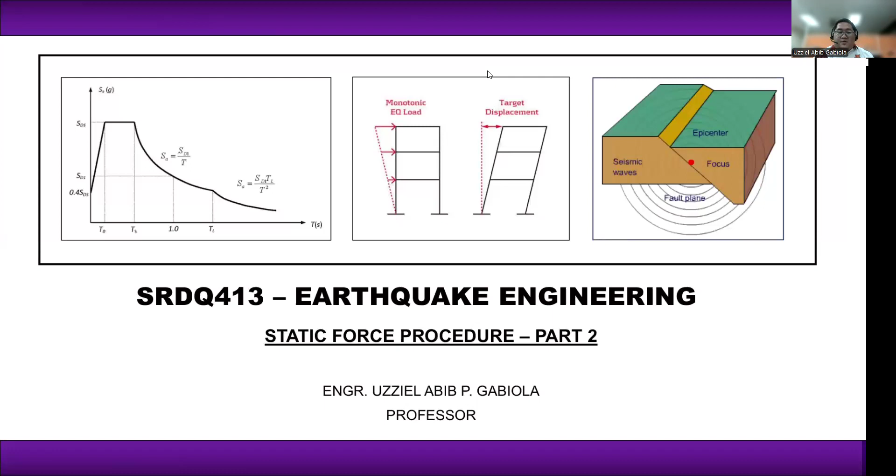Para doon sa ating pag-calculate ng earthquake o yung seismic force natin. So for static force procedure, ito yung kailangan unang ma-identify natin: we need to calculate yung structural period natin. So when we say structural period, we are pertaining dun sa time it takes the structure to oscillate or to go back to its original position in one cycle ng ating oscillation ng ating earthquake.

As mentioned, we have two methods: method A and method B. For method A, we have this equation, T is equal to C sub T times H sub N raised to 3/4, wherein yung C sub T will depend on the type of material used in your structure and kung anong structural system meron tayo. Let's say, for this example, we have a steel moment resisting frame.

So we will be using this value. If we have an RC concrete moment resisting frame, we will be using this value. If the structure that you have doesn't fall under these two categories, we will be utilizing the other value, which is for other structural systems na meron tayo.

And then we have here yung H sub n natin, na ang alam natin, H sub n correspond dun sa height nung pinaka-top ng structure natin in reference with our natural grade line. Okay, so sa NGL natin.

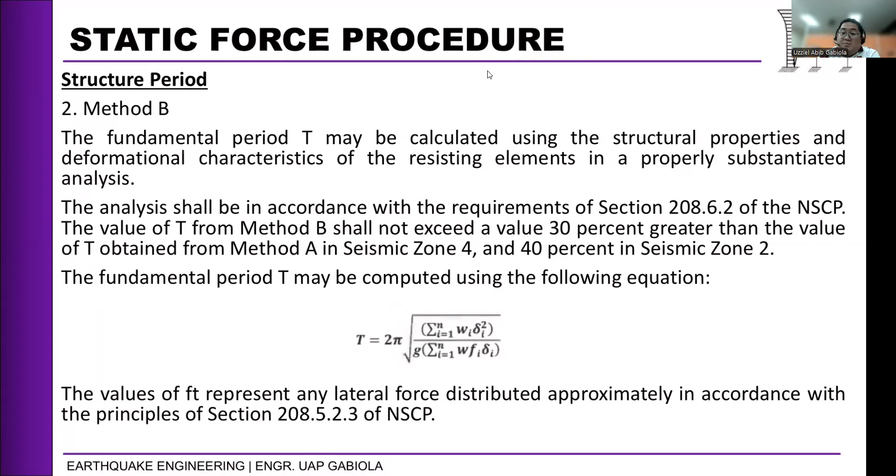We also discussed last time yung method B. Pero for method B, we said na this would take further analysis kasi kailangan natin yung deformation ng structure natin. Para ma-simplify natin yung approach, since we tend to calculate lang naman muna yung possible value, yung conservative value ng earthquake or seismic force, we tend to use method A lang for our discussion. So ang gagamitin lang natin is itong method A, which is itong formula na ito.

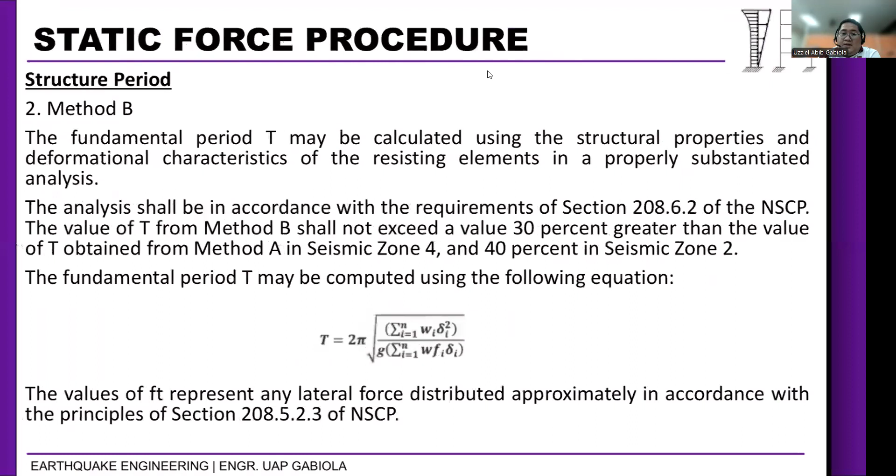After identifying our structural period, we can now calculate yung design base shear natin based from these equations. Sa design base shear, nakadepend siya doon sa mga parameters na diniscuss natin during our preliminary or introduction sa earthquake resistant design. For this case, we have here yung formula for the design base shear, wherein that is equal to C sub V, yung ating seismic coefficient, multiplied by our importance factor based from our occupancy category, divided by our response modification factor in reference to table 208-11 ng NSCP.

Depending on the type of material, may value po yan. And then yung T natin, which is yung period natin. After that, that is being multiplied dun sa weight ng structure natin, o sa total weight ng structure.

So after calculating the design base shear, we need to compare it with three values: 3 kapag zone 4 tayo, pero pag zone 2 tayo, 2 values lang. So we have here yung maximum natin, this can be considered as our Vmax. Okay, Vmax, so that is equal to 2.5 CaI over R times W.

And then we also have these two equations. This will be our V minimum. Let's put a subscript na one kasi that will be used when our structure is located inside seismic zone 4. So dalawang consideration for minimum, whichever is larger yun yung mag-gogovern, at i-compare natin with our design base shear. So this will be our V minimum 2.

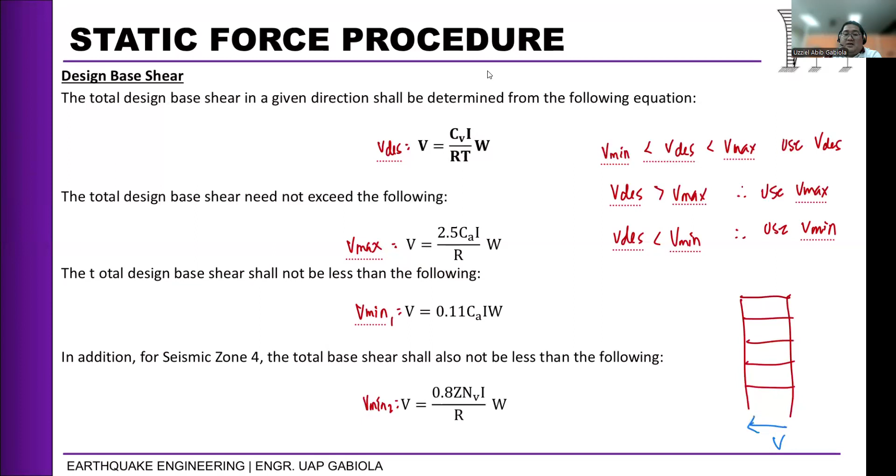And to do that, we need to understand the vertical distribution of our base shear, or the distribution of force. The code specifies a formula for that. The total force, or the base shear, shall be distributed over the height of the structure in conformance to the following equations.

So the first one is this: F sub t plus summation of f sub i is equal to V, from i equals 1 to n. So we have two terms. Actually, we don't need to memorize this at all, because it only means that when we have a structure - let's say we have this frame.

At the top of our frame, there is a force - we'll call it force FT. And then on the succeeding levels, or even on the top, we have Fn. And then we have Fn minus 1, Fn minus 2, Fn minus 3, then Fn minus 4. So we have a diminishing value of forces or lateral forces at each floor level.

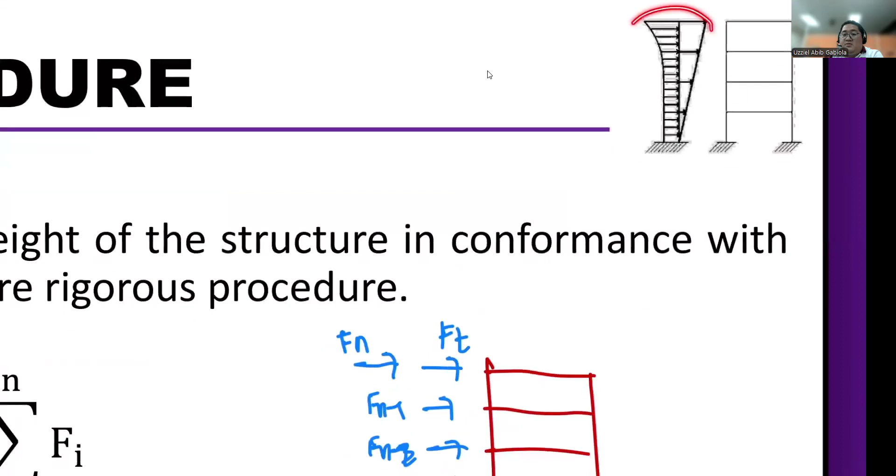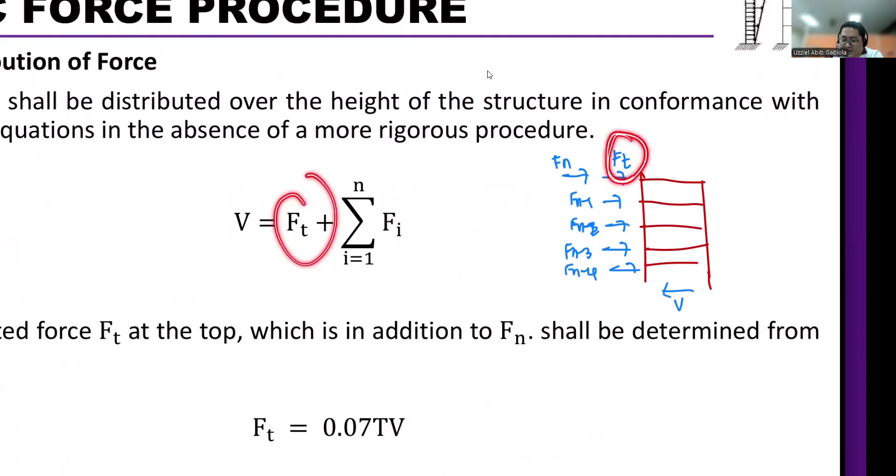Because as our stories become higher, at the higher level, the seismic or lateral forces due to earthquake become stronger. So the value of our forces should look like this at the top - the distribution is larger at the top and decreases as we go down in value. So as you can see, our base shear should be equal to the summation of the force at the top plus the summation of all the rest - they should be equal to each other.

And then in calculating for F sub t, we have this equation: F sub t equals 0.07 times T times V, where T is the period of our structure. So we need to calculate our period, and also multiply it by our base shear.

But there's also a requirement in the code. Once we calculate our F sub t, it should not exceed 1/4 of our base shear. Also, for our period, we need to check that when our period is less than 0.7, we don't need to consider F sub t - we can neglect it. But if, for example, it's more than 0.7, we need to add F sub t to our F sub n, or our topmost level.

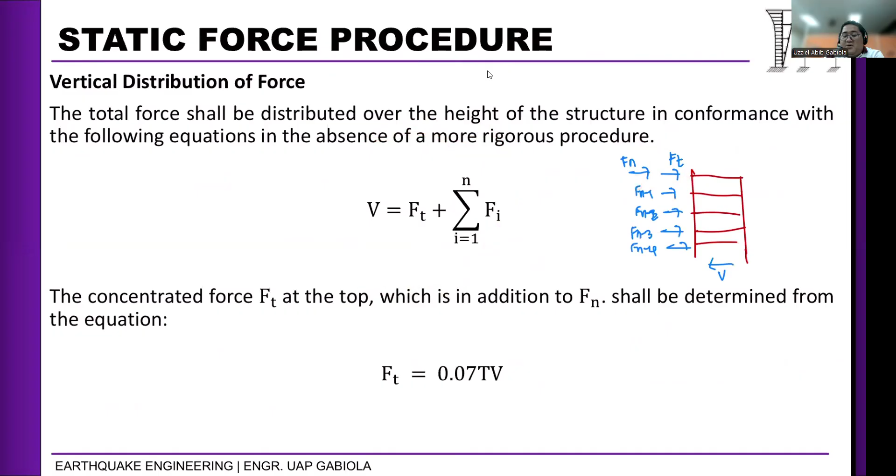So to get the value of forces acting on each floor level, this is the equation we'll use. But we don't need to memorize this one - we just need to understand what this equation represents. As you can see, in the first part, V minus F sub T, this just represents our base shear itself at the bottom.

Binabawasan lang natin yung value ng F sub T, yung capacity ng force at the top. So binabawasan natin, multiplied by a product ng weight at height natin, yung relative height ng floor level na pinakinaan natin, all over yung summation ng mismong product ng weight times height.

So later we will demonstrate how to calculate or distribute yung mga forces natin. But first, we need to answer again this example that we had. Ni-revise ko lang po yung drawing, but the same procedure applies.

Una, determine natin yung design base shear for a five-story concrete SMRF, Special Moment Resisting Frame building. Given: zone 4, Z equals 0.4; seismic source type A; distance of seismic source is 10 kilometers; soil profile type SC; importance factor I; R equals 8.5; and weight equals 7,300 kilonewton. Itong 7,300 kilonewton is taken sa weight ng each floor level natin. When we sum up this floor level, that is equivalent to 7,300 kilonewton.

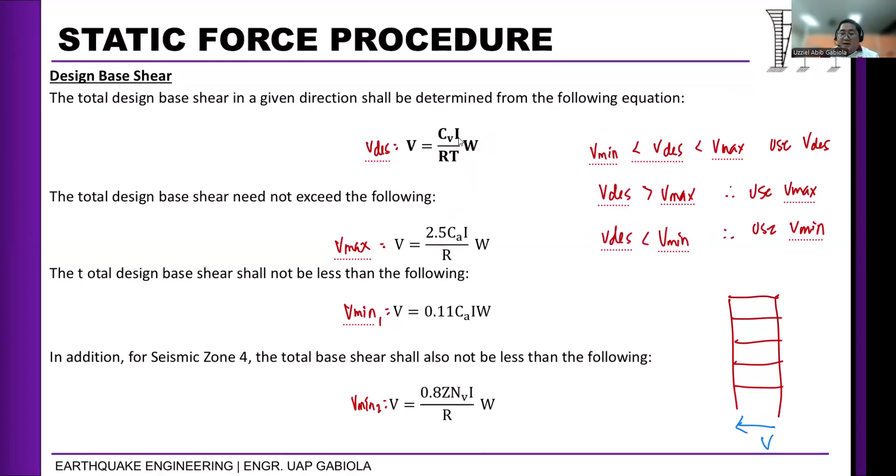Okay, so ito hindi pa to identified. Si I, okay na tayo. Si R is already given, 8.5. If not, dapat titingnan nyo siya sa 208-11 ni NSCP. Si period is not yet calculated. Si W meron na. Si CA, wala pa din. So kailangan muna natin kunin yung parameters natin, yung mga factors natin from the condition ng ating mismong location ng site natin.

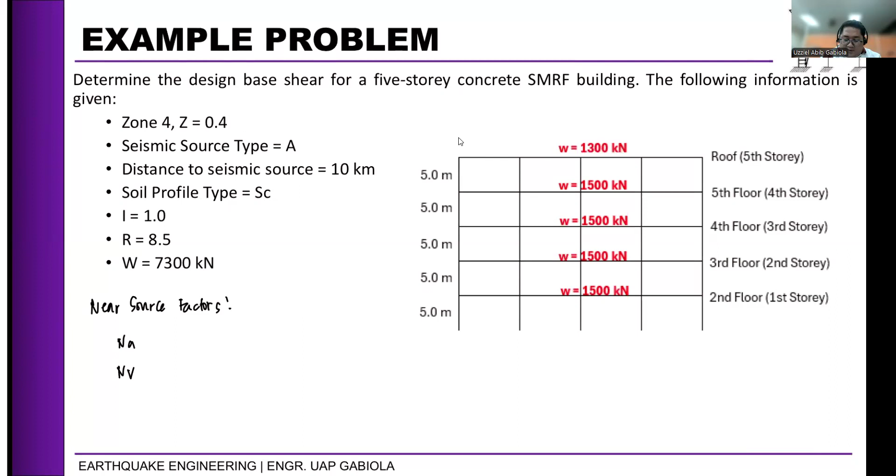Una is to calculate the near source factor, yung NA at NV natin, considering yung ating properties na nandito na. Let's use this table. Our seismic source type according sa given is type A, at ang location natin is 10 kilometers. So gamitin natin yung intersection nila, A at 10 kilometers. Ang intersection nilang dalawa is 1.0 for NA, then 1.2 for NV.

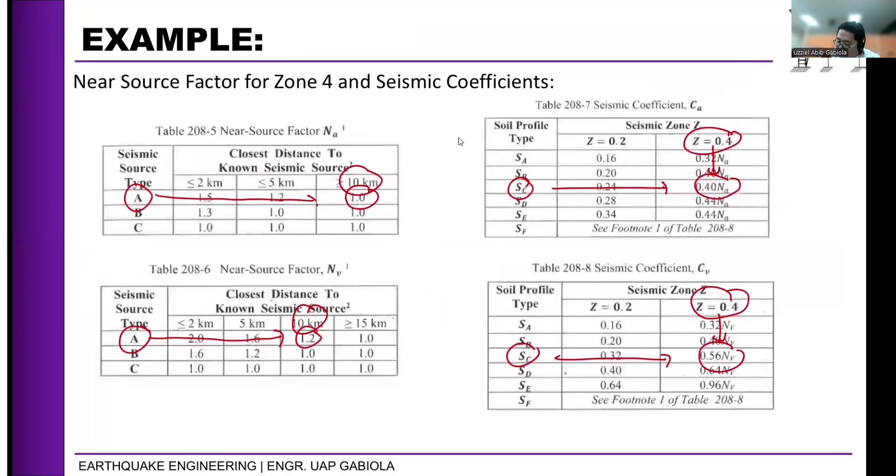At para sa CV, 0.56 ng NV. So CV is equals to 0.56 times 1.2, that is 0.672. Okay, so after calculating yung CA and CV, we can also calculate yung value ng ating period.

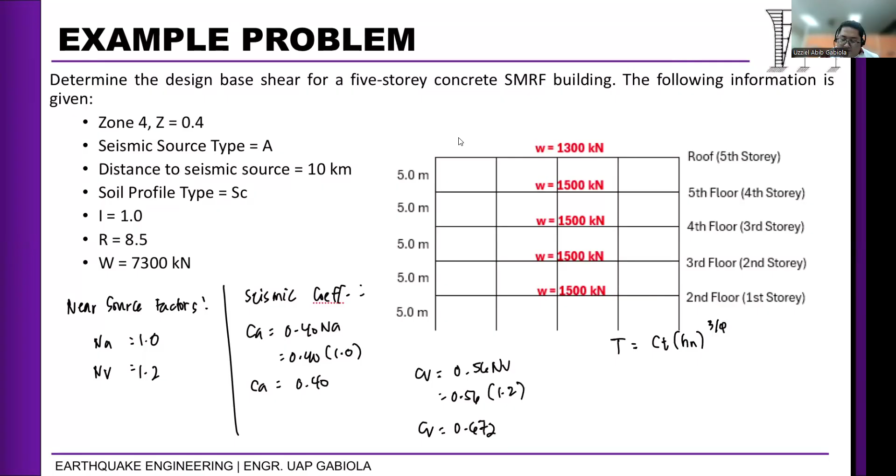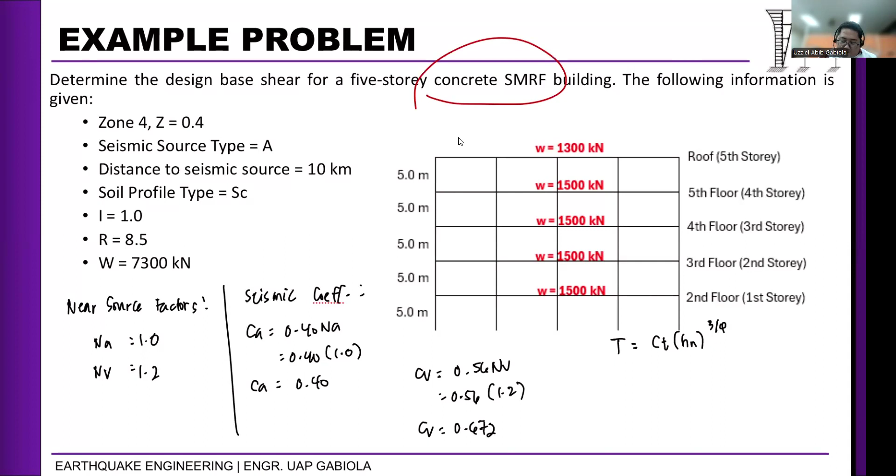Period is C sub T, H sub N, raised to 3/4. Ano ba yung type ng material natin? Sabi niya, let's say concrete, special moment resisting frame. So going back sa formula ng period, we have RC, concrete moment resisting frame. Ibig sabihin, ito yung value ng CT natin, 0.0731.

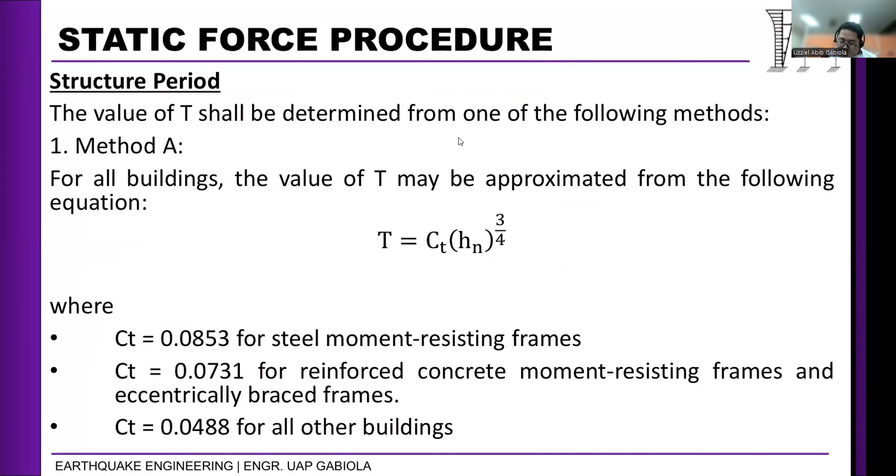Okay, so that is 0.0731. Then yung height natin from our natural grade line, papunta dito sa taas, yung total niyan, of course, is yung ating 25 meters. So, 25 meters, 3/4. So T natin is equals to 0.0731 times 25 raised to 3/4. Okay, so that is 0.817 seconds.

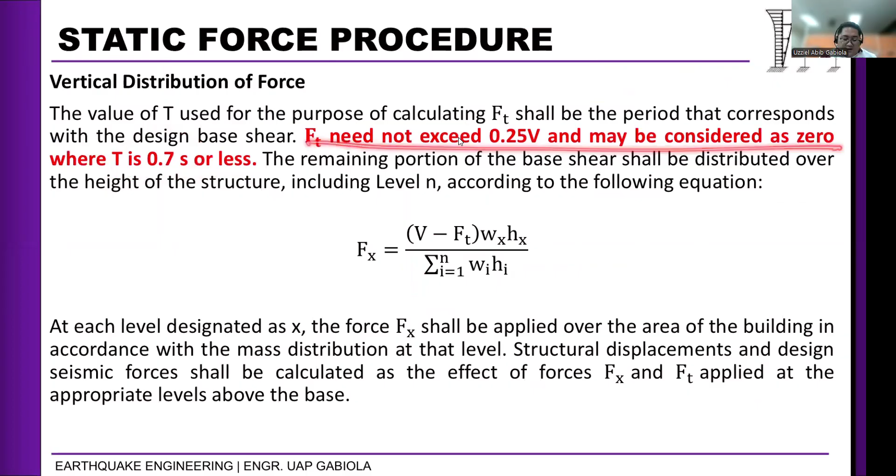So as you can see, this is greater than 0.7 seconds. Sabi natin dun sa requirement natin for vertical distribution, kung T is 0.7 or less, yung F sub T natin will be 0. Pero since greater than 0.7 yung ating T, ibig sabihin magkakaroon tayo ng value ng FT. So FT is not equal to 0.

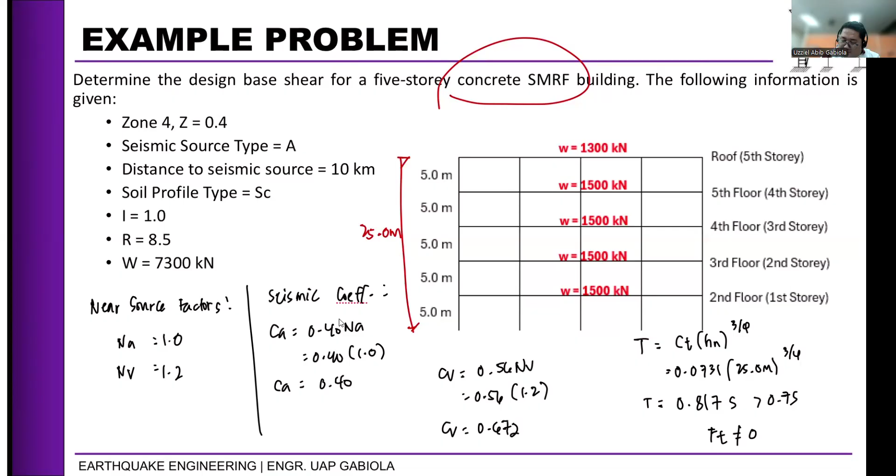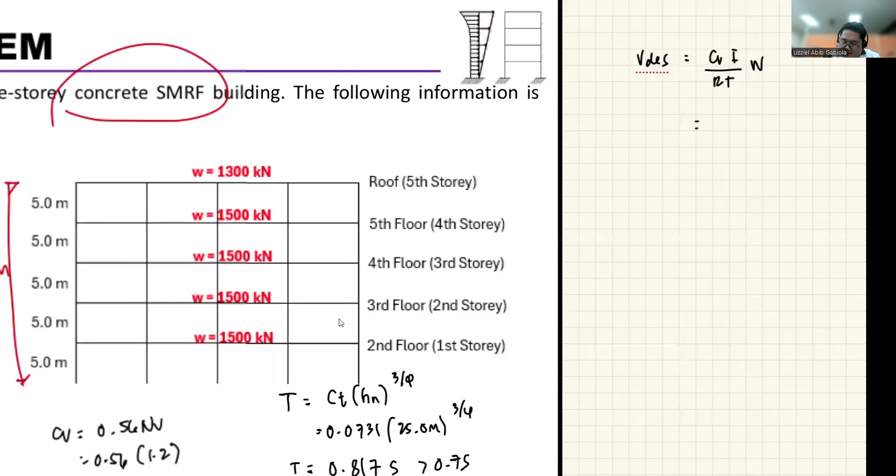Okay, mamaya natin i-ano si FT. Doon muna tayo sa base shear. Okay, next, punta tayo sa base shear. So ang kailangan natin ngayong formula is yung apat. So, sa design base shear natin, ang formula natin is CV I all over R times T times W. So yung CV as calculated will be 0.672.

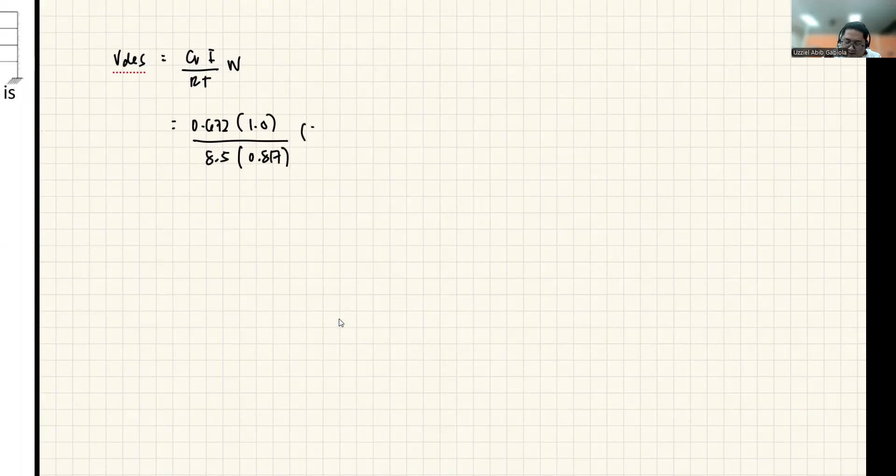So yung importance factor is 1. Ang R is 8.5. Ang T is 0.817. Ang weight natin is 7,300. So yung V design natin would be 0.672 times 7,300 by 8.5 times 0.817. So that is 706.4 kilonewton. Okay, that is our design.

Okay, let's compare it with our maximum and minimum. For maximum, that is 2.5 of CA I all over R times W. So that is 2.5, ang CA natin is 0.4 times importance factor all over 8.5 times 7,300 kilonewton. Okay, so 2.5, 0.4, 1, 8.5 times 7,300. That is 858.824 kilonewton. Yan yung Vmax natin.

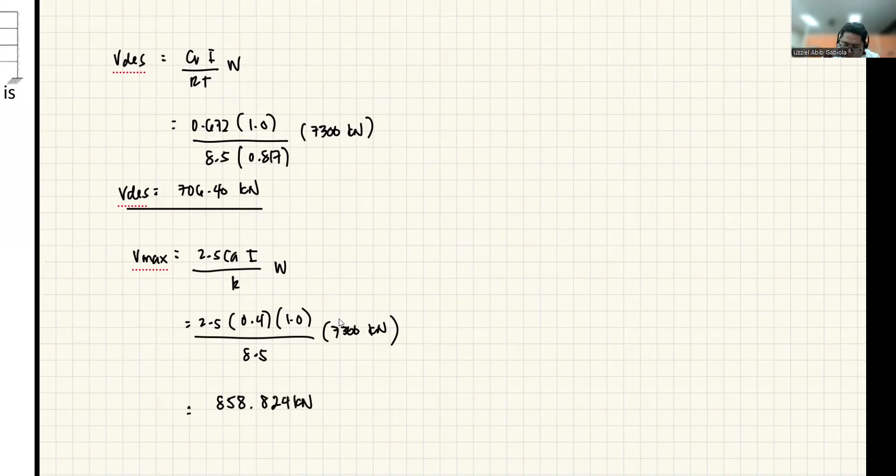Okay, next is yung Vmin natin. So Vmin 1 muna kasi nasa zone 4 tayo. 0.11 CA I W. This is 0.11. CA natin is 0.4 times 1.0 times 7,300 kilonewton. So V min is equals to 0.11, 0.4 times 1, 7,300. That is 321.2 kilonewton. So V min 2, that is 0.8 Z NV I over R times W.

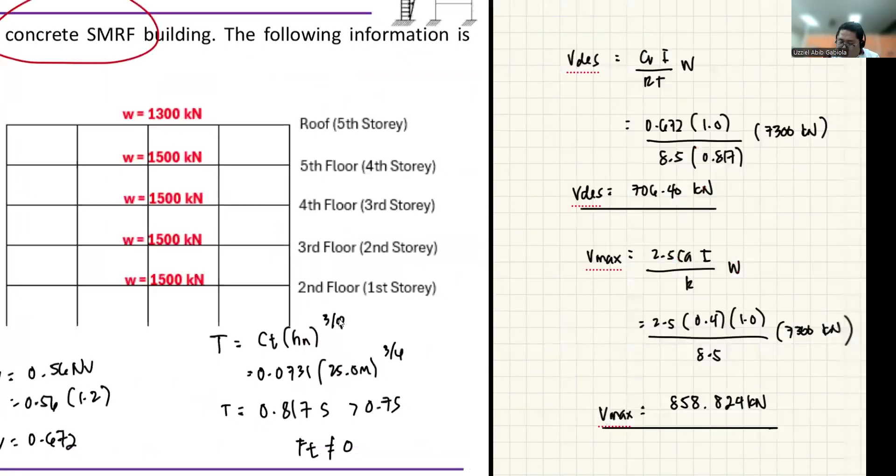That is 0.8 times 0.4, and NV natin is 1.2, 1.2 times 1.0 all over 8.5 times 7,300 kilonewton. Okay, so we have 0.8 times 0.4 times 1.2, 7,300 divided by 8.5. That is 329.788 kilonewton. Okay, so looking at these values, so we have our design na 706. That is, yung maximum natin is 858.

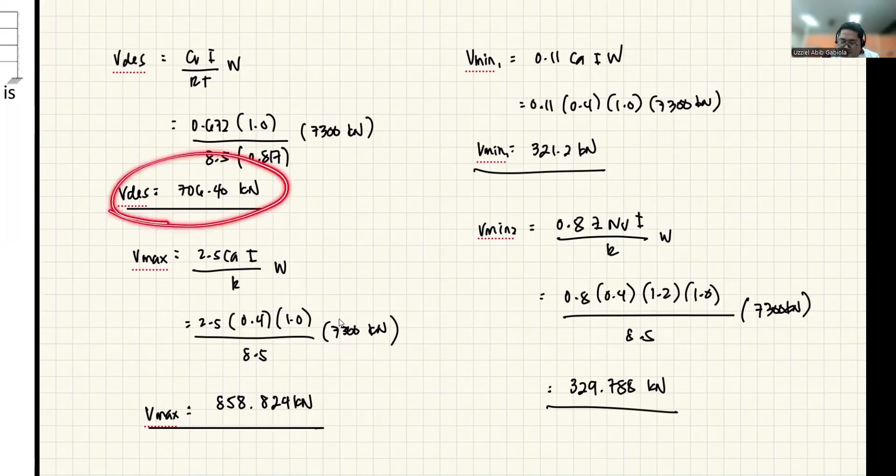So between these two, okay yung V-design natin pasok siya dun sa maximum. Na sa minimum, itong dalawa ang minimum natin. Whichever is dapat greater, ano ang magiging minimum natin? So ito yung dapat maging minimum natin. Pero pag kinompare natin with dito, that is also pasok. So ibig sabihin, ang governing na V natin, V governing, is equal sa 706.4 kilonewton. So ito yung magiging sagot natin doon sa question kapag ano yung magiging design base shear natin.

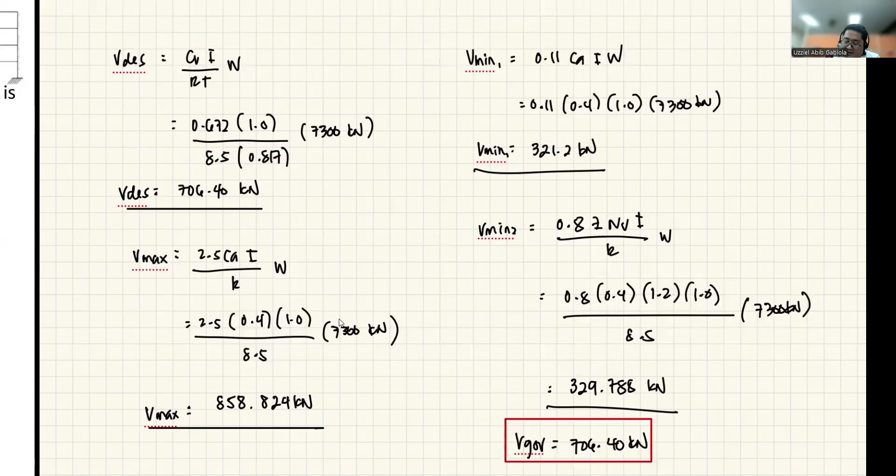Okay, so ngayon ituloy natin. Gawin natin, calculate natin yung vertical distribution ng ating seismic force na 706.4 doon sa structure natin. Again, our structure is a 5-story. So this is yung fifth, 4, 3, 2, 1. Okay, so yan yung story natin. Halimbawa yan yung structure natin.

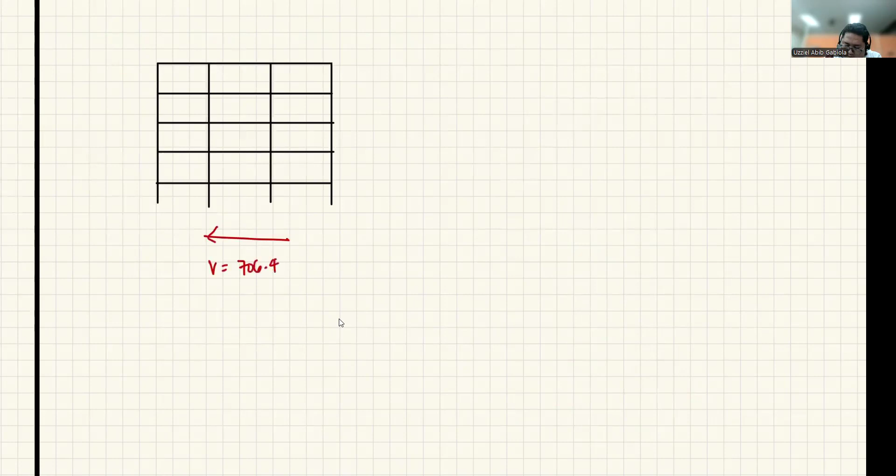And ang calculate natin, V, lagyan natin dito. V is 706.4 kilonewton. Okay, ang gusto natin ngayon malaman is ano yung magiging value ng ating seismic force. So meron tayong F sub T, tapos meron tayo dito F sub N. Lagyan na natin dito, this is yung F2, F3, F4, F5, tapos F6 yung isa.

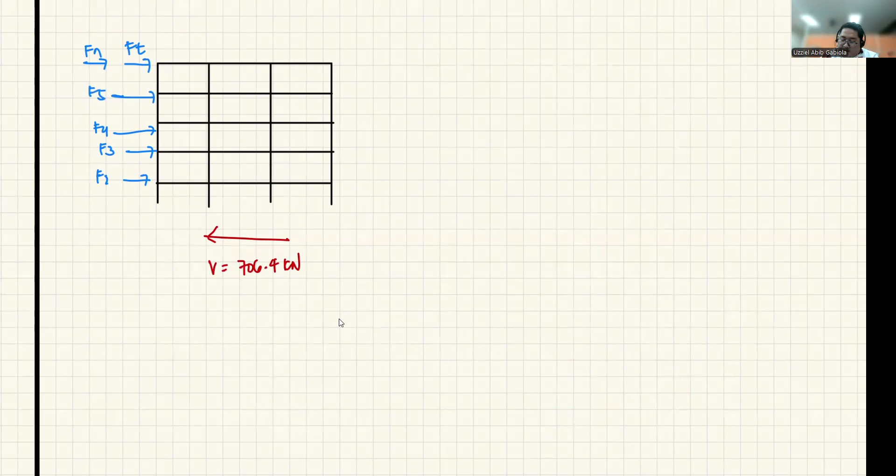Alright, so again, yung ating period is 0.817 seconds, that is greater than 0.7 seconds. Okay, so sabi natin F sub T is not equal to 0. So F sub T is equal sa 0.07 ng period times yung ating base shear, 0.07 times yung 0.817 times yung ating 706.4, yung F sub T natin, 0.07 times 0.817 times 706.4, that is 40.4 kilonewton. Okay, yan yung value ng F sub T natin.

So, to calculate yung ating lateral forces, F sub X, that is V minus F sub T times yung WI, HI over summation ng WI, HI. Okay, so gagawin natin ngayon is to calculate muna si V minus F sub T. Okay, so that is 706.4 minus 40.4. That is 666 kilonewton. Okay, so again, sabi ko para mas ma-utilize natin to, yung formula na ito, we need to tabulate yung values natin. So we have floor.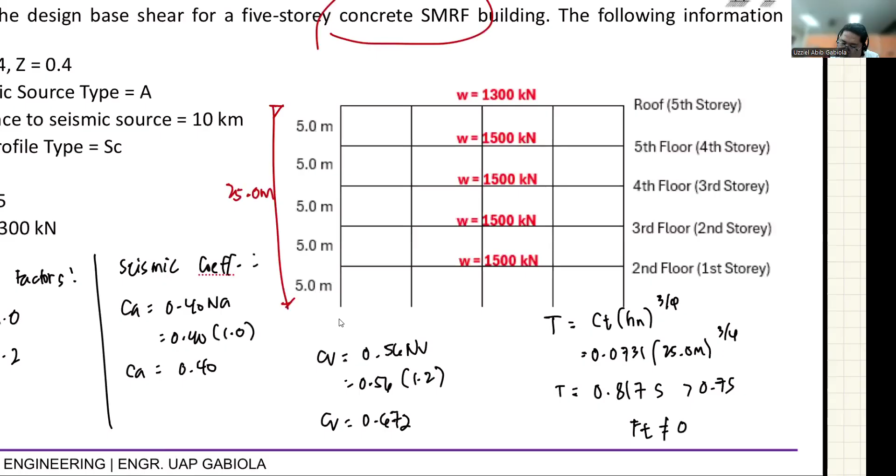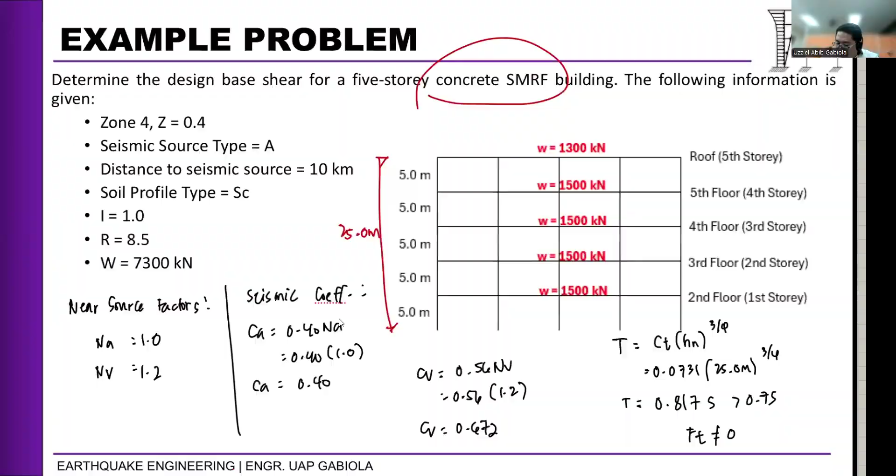Okay, so halimbawa, floor 1, 2, 3, 4, 5, 6. So we have 6 floors, kasi 5-story tayo, kasama yung roofing. And then, second column, let's put...

Yung kanyang weight, yung WI. And let's put yung kanyang height, yung relative height dun sa floor level na yon. And then yung total, yung product nitong dalawa.

Okay? So sa floor 1, we don't have a weight. Hindi na binigay, pero syempre meron tayong weight dito, pero ang kumakarga na sa kanya is yung ground natin, hindi na siya i-carry yung structure natin.

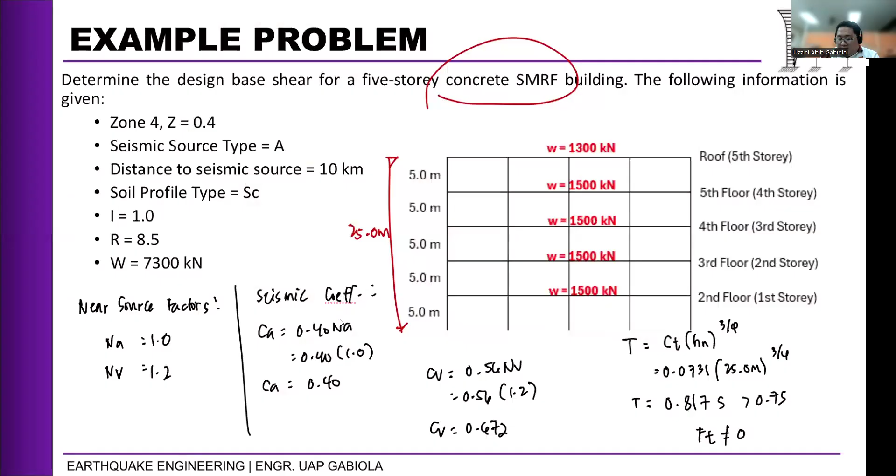Okay, so kaya dito tayo mag-start. So 1,500, 1,500 tayo. So we have 1,500 dito, 1,500, 1,500, 1,500, and then 1,300.

Okay, then the height. Height natin, 0 to sa second level, yung height niya mula dito, that is 5 meters. Kasunod, yung third level, so this is 5 per story, so that is 10, 15, 20, and 25.

And then product lang natin to. This is 0. So 1,500 times 5, that is 7,500. 15,000.

We have 22.5. We have 30. And then, so we have 32.5.

Okay, and then kukunin lang natin yung total niya para doon sa equation natin na nasa ilalim nung equation natin. Ito yan, yung total nitong weight na to. So, 7,500, 15,000, 22.5, 30, tsaka 32.5. That is equivalent to...

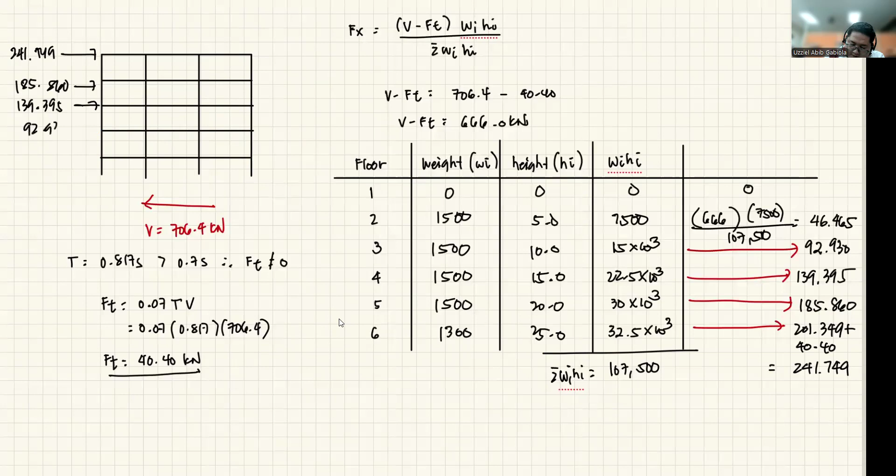Next, 139.395, 92.93, and then we have 46.465. Okay, so pag ginawa natin yung sum nito, pag sinum natin: 241.749 plus 185.86 plus 139.395 plus 92.93 and 46.465.

The answer is 706. Yung total, ano? 706.398. Okay, which is roughly the same dito. It should be equal, kasi nga, kailangan distribute lang natin yung mismong force natin dito sa mga floor level natin.

So, that is how you distribute yung mismong value ng ating base shear dun sa mga level natin each floor. Ibig sabihin, ito yung kailangan i-resist ng floor level na to. Ito yung kailangan i-resist ng floor level na to. So, for vertical distribution, ito na po yung magiging answer natin.

Alright, so one way of checking it is to check or verify kung mag-equal yung dalawa. It should always be equal. Pag hindi na equal, there's something wrong with your calculation, so you just have to go back and recheck everything. Baka meron kayong mali ng pindot sa calculator. Pero that's it.